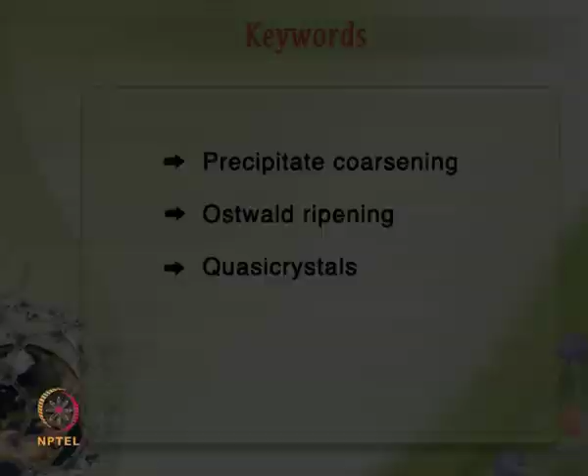Last class we were talking about precipitation. There is one concept in precipitation which we have not yet covered. I thought today we will talk about it, that is coarsening.

Particle coarsening. People also call it by another name. Anybody heard of it? Any precipitates, when you heat them to higher temperature, take the alloy to higher temperature, the precipitates coarsen. This phenomena has a name generally used in age hardening. It is called Ostwald ripening.

Ripening, yes. Both basically refer to the same concept. So why should particles coarsen? All of you know, whenever the temperature is high, diffusion is there, so there is growth.

But at the same time, if all the particles are of the same size, if you assume there are a number of particles inside the material, all precipitates, and all of them are of the same size, then you would never see any particle coarsening. Particle coarsening happens only when there are particles of different sizes, and in fact some particles dissolve and decrease in size, while some particles increase in size.

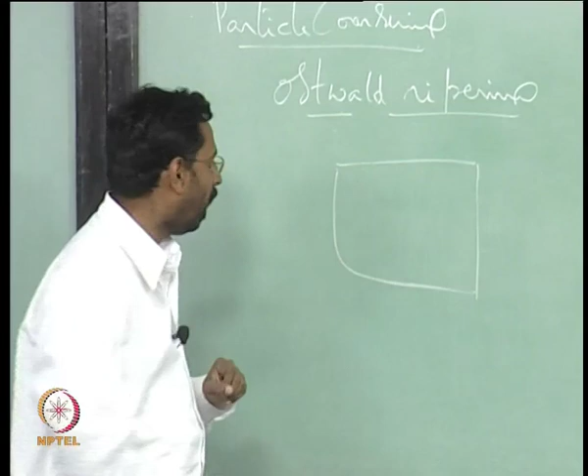This is the basic phenomena of coarsening, and we will understand it again through the same free energy concepts. If you look at a material, let us say this is one grain and you have particles of different sizes, something like this.

You may ask me, sir, how do you get particles of different sizes? When do you get particles all of the same size? Can you tell me? If there is homogeneous nucleation at some time t equal to 0 and there is no further nucleation after that.

Nucleation is a transient phenomenon, and I told you that there is a hierarchy of sites where nucleation can happen. For example, nucleation can happen on the surface first, then at grain boundaries, then at stacking faults, dislocations, and vacancies. So there are a variety of places where nucleation can take place, and once certain nucleation sites are occupied, the other nucleation sites start becoming active.

The nucleation sites with the highest energy, once they are all occupied, then the nucleation sites with lower energy, lower with respect to the highest energy, will start working. For example, if for some reason it is not possible to nucleate on the surface, or if the surface is fully covered with nuclei...

then as a function of time the nuclei which have formed on the surface will start growing, and at the same time you will start seeing further new nuclei, either at the triple junctions or at the grain boundaries. And once they are covered, as they start growing you may see further nucleation taking place, maybe at the stacking faults or at the dislocations.

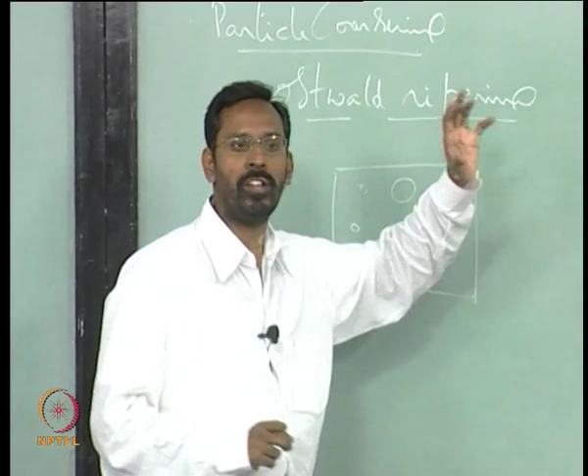We know pretty well that at high temperature you are providing sufficient thermal energy and thermal activation for diffusion to occur. So there is a possibility that all particles can grow, but do you see all the particles grow or not? If we try to understand this precipitate which is in equilibrium with the matrix, and this other precipitate which is also in equilibrium with the matrix, the matrix composition in equilibrium with each is never the same.

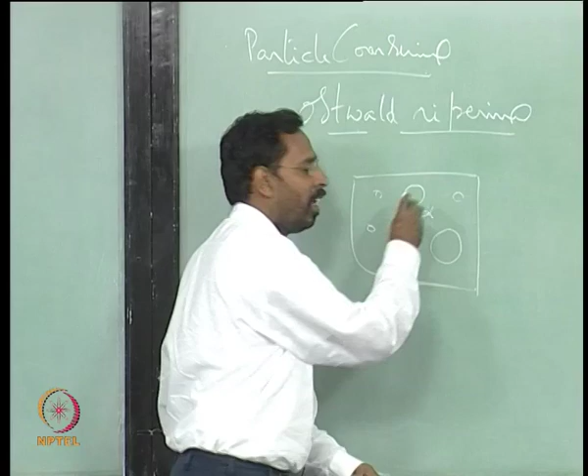How does this come about? The matrix composition, which is alpha in our case, let us say this precipitate is theta. The composition of alpha in equilibrium with this theta is the same, and this is also the same theta. But the composition of alpha in equilibrium with this theta is different from the composition of alpha in equilibrium with that theta. Why does this happen?

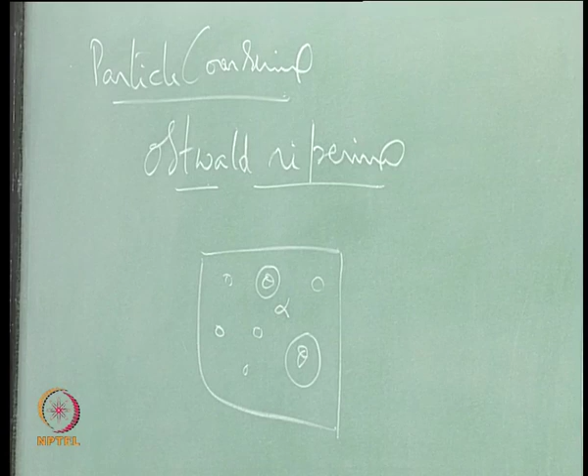The composition around that theta, copper will be less. Why? Because the diffusion has occurred for a longer time? No, it has nothing to do with diffusion. It is the curvature effect.

Because of the curvature effect, you would see the free energy of those two particles is different. Whenever we talk of a free energy diagram, we always talk about volume free energy only, we do not bring in the surface free energy term. That is why in all the free energy-composition diagrams you draw, you assume that the precipitate size is infinite.

Actually the precipitate size is not infinite, and different precipitates will have different free energies, though they all have the same structure and same composition, because the surface energy has to be added to the volume free energy to get the actual free energy.

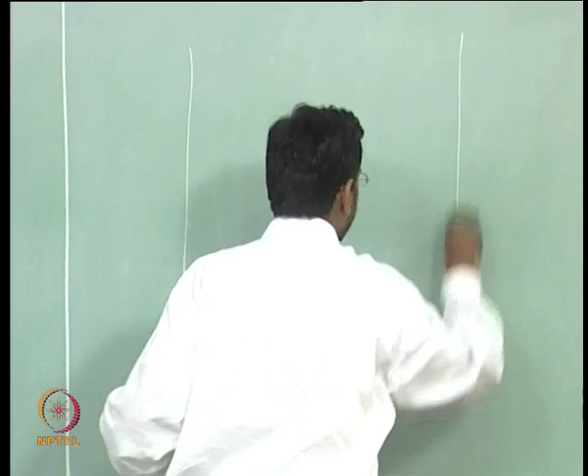So a smaller particle will always have a higher free energy compared to a larger particle. If we draw this Gx diagram, this free energy-composition diagram, this is alpha, and this is theta phase with a larger particle and theta phase with a smaller particle.

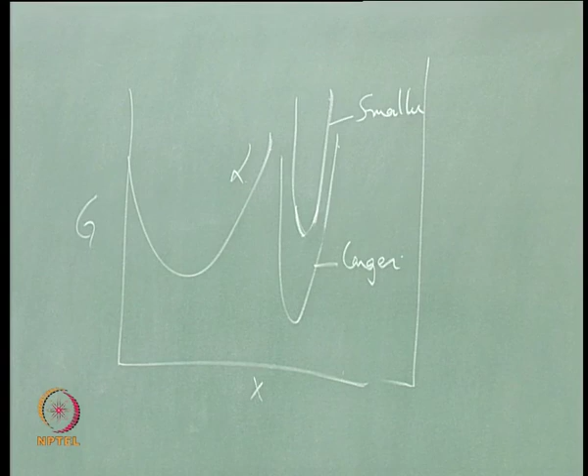So a smaller particle will always have a higher free energy compared to the larger particle. If I now draw a common tangent, you would see this concept I just mentioned: the composition of alpha in equilibrium with a larger particle is different from the composition of alpha in equilibrium with a smaller particle.

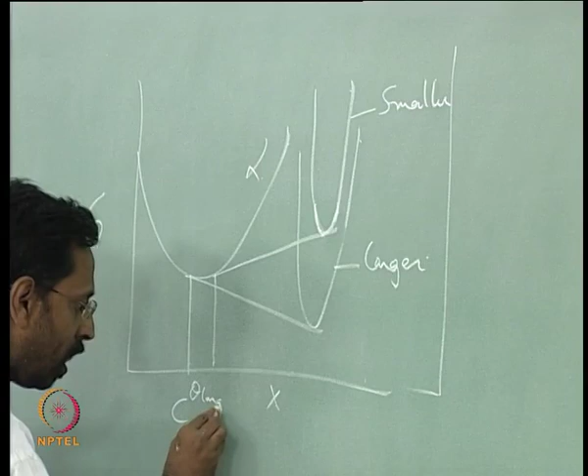So this is the composition of alpha in equilibrium with theta, which is let us say larger, and similarly this is the composition of alpha in equilibrium with theta, which is smaller.

The moment that is the case, if I now look at a smaller segment where you have one small particle, one large particle, and alpha in the middle, the composition of alpha just in front of this particle is different from the composition just in front of that particle. Which is higher? The smaller particle has the higher composition.

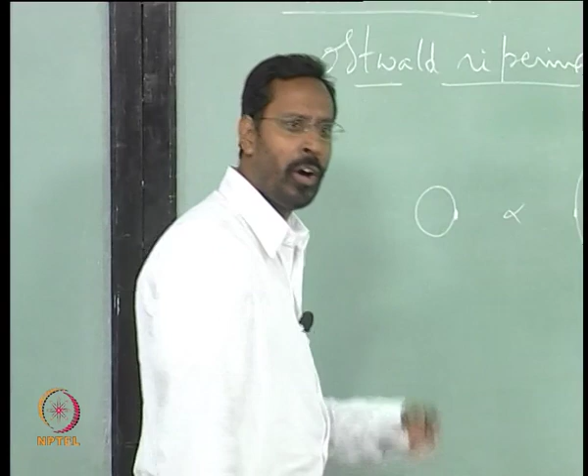So if I now draw what is called the compositional profile, how would it look? What is the composition of the theta phase in aluminum copper? Al2Cu or CuAl2, am I right? And what is the composition of alpha?

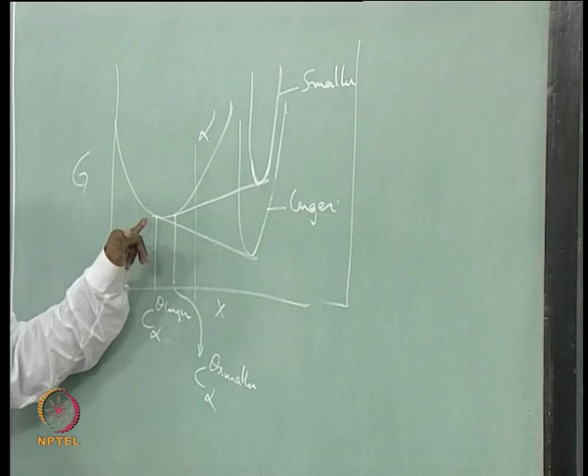That is the composition with which you have started, the alloy composition, somewhere here, which will be a two-phase mixture. What we are talking about is the equilibrium composition of alpha. If you look at the phase diagram, this is let us say alpha plus theta here, and this is alpha. So we are talking, at any given temperature, about this composition.

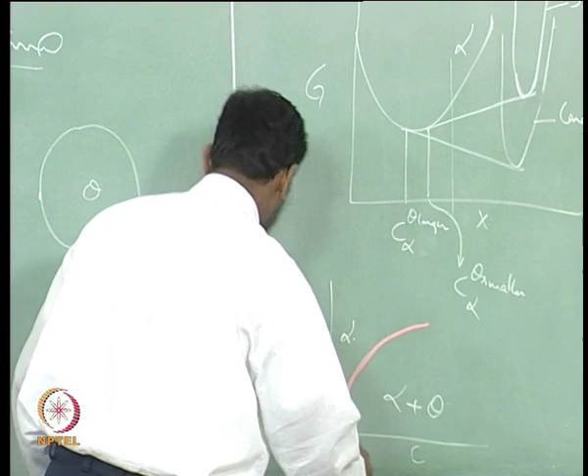This composition you are looking at is, of course, a temperature versus composition diagram, or Tx diagram, since we called the other one a Gx diagram. This line, what is it called? The solvus line. This solvus line always assumes that theta has an infinite size.

Any phase diagram, any solvus line that you see, the assumption is that the second phase and the parent phase, both are... the parent phase is anyway a matrix. So you can't talk about a size of it. And there, in principle, if the parent phase is also a nano grained alpha, let us say, it would definitely have a different free energy. So there also we always assume that the grain size of alpha is infinite, and also that the precipitate is also almost an infinite size.

The moment you bring in size effects, then you will start seeing that the free energies start shifting. The alpha also, instead of an alpha of a very large grain size, if I now start looking at nano grained alpha trying to precipitate out of the theta, then the alpha free energy curve also will shift. So nano grained alpha will have a definitely higher free energy with respect to an alpha of a much larger grain size. So all those things are what we call size effects.

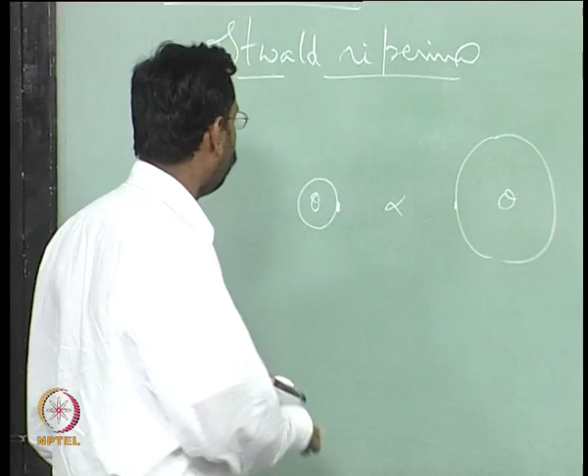So this solvus is in principle for an infinite size, and the moment I assume that the theta has a smaller particle size, you would see that the composition will be different. And if I try to draw, you would see that if I draw composition...

Let us imagine that this precipitate has a certain composition. This is the composition in terms of percentage copper. If I plot, this is some value, let us call it whatever the Al2Cu composition is. In terms of weight percent, it is approximately, let us say, 55%.

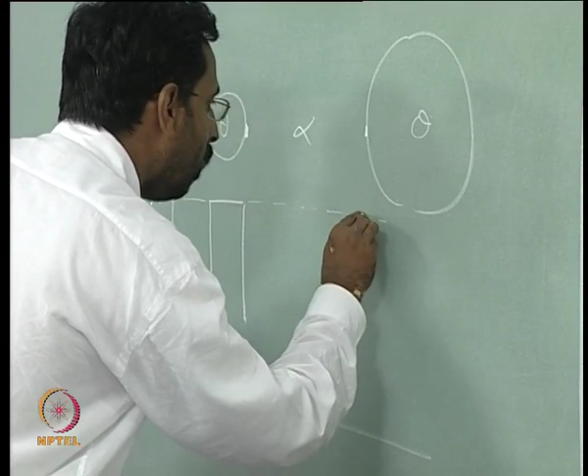Now this is the composition of alpha somewhere here, which is, just for the sake of understanding, let us again take this. The composition here also, inside the precipitate it is the same composition, it is the same theta, this whole thing is theta. So the composition of the theta is this value. So inside the theta the composition is this, and then if you look at this is the alpha composition here, and the alpha composition here will be different. So there is a gradient here inside this.

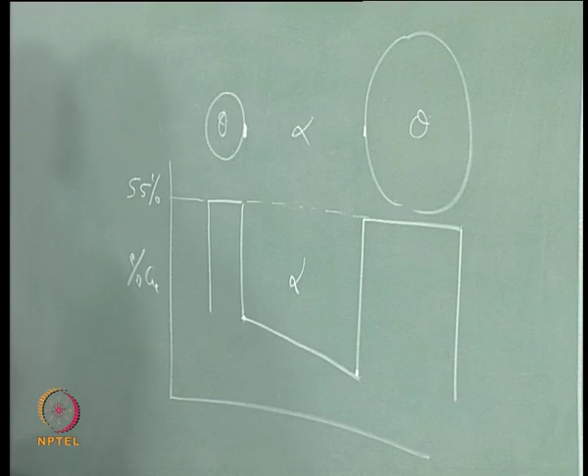So if I look at the concentration profile, it looks like this. If I start from the center of the particle to the center of the next particle, let us not bother about the other sides, because on this side there may be another particle, on this side there may be another particle — we will not bother. So we simply look from the center of this particle to the center of this particle. If you simply look at the composition profile, this is how you will see it.

Inside the alpha there is a gradient here. The smaller particle — the alpha which is in equilibrium with the smaller particle will have a higher composition, the alpha in equilibrium with a larger particle will have a smaller composition. And once you have a gradient, you always have diffusion, you will always have a flux at any given temperature.

Because flux J equals minus D into dC by dx, and that dC by dx you can see here — the x is nothing but the interparticle distance. Once you know the interparticle distance, you can talk about what is dC by dx, and at any given temperature D can be known. So you can actually see, and how — what is the result of this diffusion?

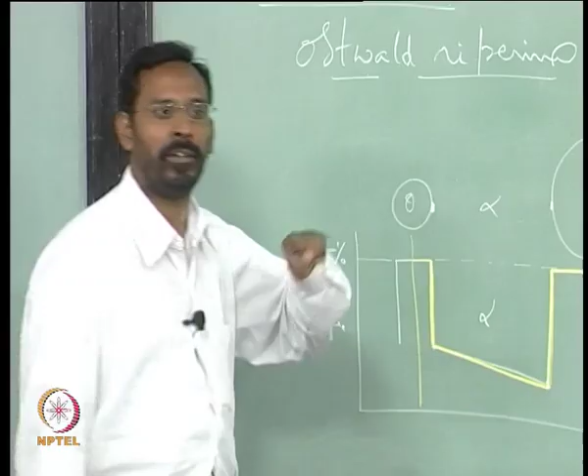You see that copper atoms which are here want to diffuse towards this, but you need a constant supply of copper atoms for the copper atoms to go down the drain, down this particular decreasing concentration gradient. Where are the copper atoms coming from? The copper atoms come from this particular particle. The smaller particle provides the reservoir of copper atoms, so that the copper atoms start moving in this direction, because the theta has a higher copper content.

So this theta rejects some copper atoms by dissolving by a small amount, small delta x of this theta. If it dissolves, let us say, what happens? Some copper atoms are released, and those copper atoms will move down this concentration gradient and come to this region, and once they reach that region, this particular theta needs copper atoms for it to grow. So it provides copper atoms.

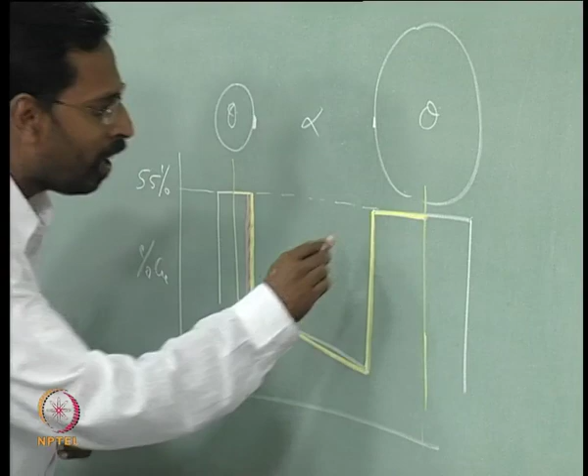Once the copper atoms come towards this, they join this particular theta, and the theta grows by a small delta x, depending on how many copper atoms have come and joined. So this gradient will more or less remain the same, except that the concentration values — this value and this value — what do these two values depend on?

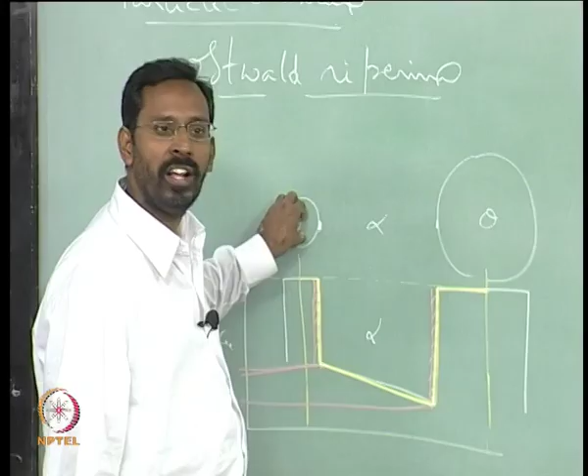As the radius of these two particles change, in principle these values also change. As a particle becomes smaller and smaller, as it shrinks, what happens? You can see as this particle shrinks, this free energy goes up. If this free energy goes up, the common tangent starts touching it at a composition which is farther, which is higher in copper content.

So that means you would see that this value keeps going up. And what happens to this? As this starts becoming larger and larger, this free energy comes down, and the common tangent again means the copper content of alpha comes down. That means you actually see that the gradient is increasing.

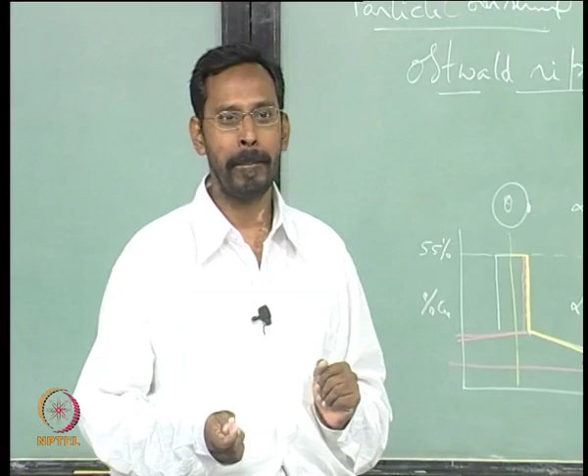Because the dc, delta c, which is nothing but the composition of alpha in equilibrium with the smaller particle, theta smaller, minus composition of alpha in equilibrium with theta that is larger, this delta starts increasing as the smaller particles start becoming smaller, the larger particles start becoming larger.

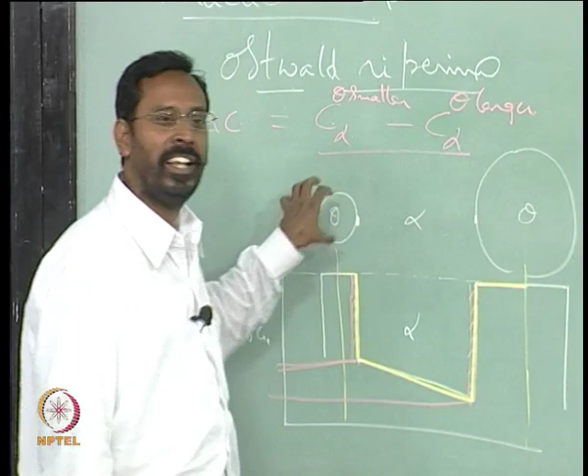So in the process what happens is, slowly smaller particles will dissolve. At the expense of these smaller particles, the larger particles start growing. It is like we see that in typical life, the bigger ones try to grab the smaller ones. Exactly the same thing is happening here. The bigger particle is just growing at the expense of the smaller particle, and the whole driving force for such a thing is coming because of this free energy.

So once you understand this free energy, that the free energy of different particle sizes will be different, you can easily understand why this is happening, and this gradient starts increasing.

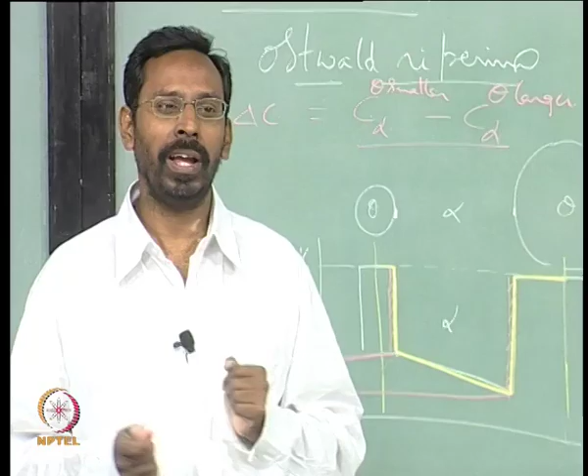And of course, the distance, you may ask what is going to happen to dc by dx, when this theta is growing and this is decreasing. In principle they may remain the same or can change to some extent, but we do not know what is the rate at which this decreases, what is the rate at which this increases. So there may be a small change in dx also, but dc you can see is significantly large, and because of which more and more.

So as the time proceeds at that temperature, you will see the flux, the rate at which the atoms move, is going to be higher and higher. This is usually against the normal case of precipitation.

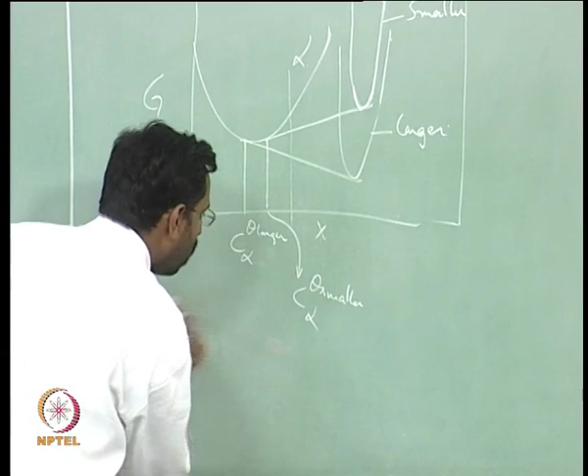In a normal precipitation, how does the precipitation happen? If you look at the precipitation concentration gradient in precipitation, so the moment the alpha, if you take alpha, inside alpha, the moment a small nucleus precipitates, a small theta precipitates, how does the further growth happen there?

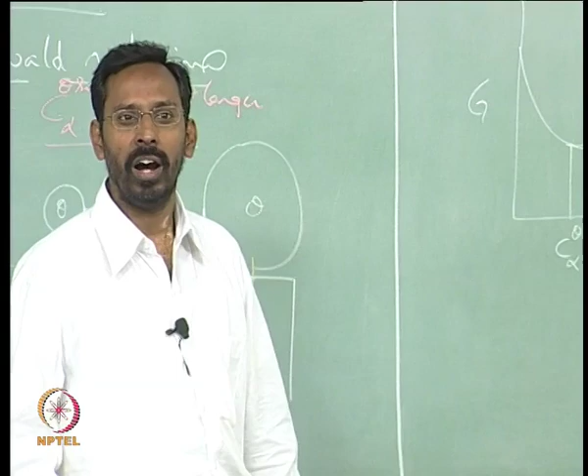The further growth happens again because of the gradient. Where is this gradient coming from? So the alpha that you have, the starting alpha, is this alpha, am I right? That is 4% copper.

The moment a theta is precipitated inside the alpha, the alpha which can be in equilibrium with the theta is not this alpha. This 4% alpha cannot be in equilibrium with theta. Why? Because if I take, forget about the smaller particle, let us look at the larger particle as the equilibrium particle, or you can choose any of them. In principle, if you look at this particle it cannot be in equilibrium with this, because you cannot draw a common tangent between this point alpha of that composition with the theta.

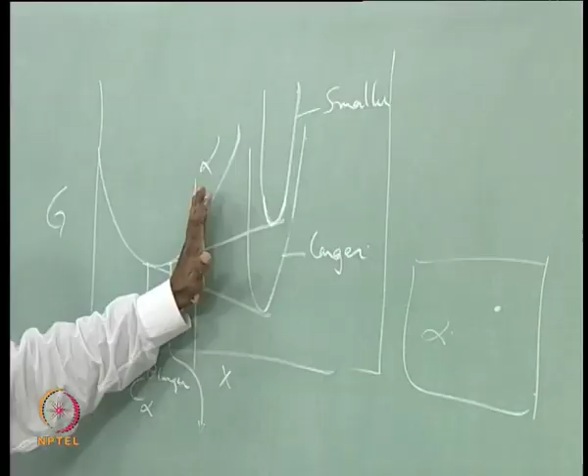The only equilibrium that you can have is with the theta with some other alpha, and that is what we call the composition of alpha in equilibrium with theta, and that composition is different from this theta with this starting alpha. And as a result, if I now draw again a concentration profile...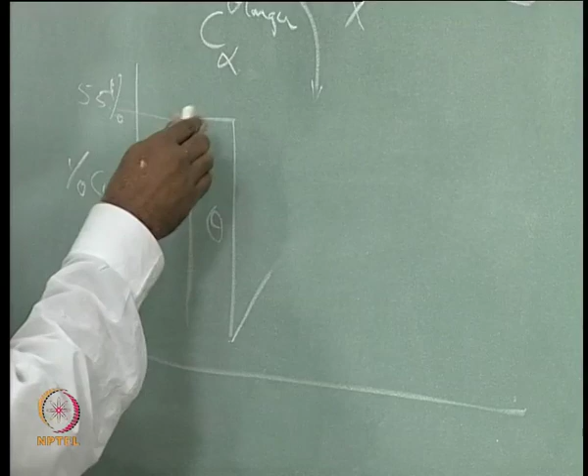Yes, adjacent to theta is a lower copper content, because of which you will see - I have really exaggerated it, it will not be like that, because this is 55 and this is actually 4%, something like this.

This is the percentage of copper, this is the alpha of the initial alpha, the alpha with which you have started. You have taken an alloy of 4% copper, made it into a solutionized condition and then quenched it, and from there the actual precipitation has started. That particular alpha is 4%, but the alpha which is in touch with the theta is actually smaller, and because it is smaller, now you see there is a gradient here.

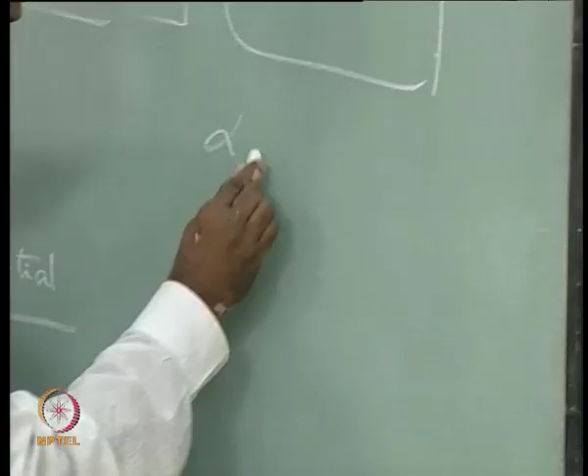Because of the gradient, the copper which is in alpha starts moving towards the interface, and once it starts moving, some copper atoms get accumulated there. Once the amount of copper atoms is sufficient for the theta, because theta is 55%, as copper atoms keep coming towards theta, once in a small region the copper atoms reach 55%, that small region gets converted. It's almost like alpha of 55% copper gets converted to theta of 55% copper.

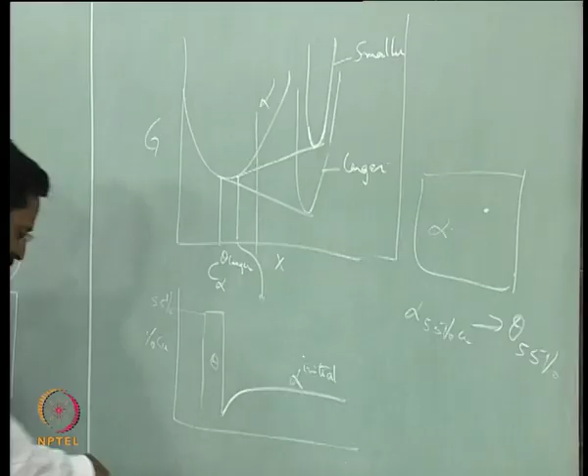It is almost like a polymorphous transformation, allotropic transformation kind of. Once the copper atoms reach that concentration level, it is only a structural transformation now, an FCC structure changes to a theta structure. So as the copper atoms get accumulated in that small region, that region gets changed to theta, and as a result the theta grows by a small distance.

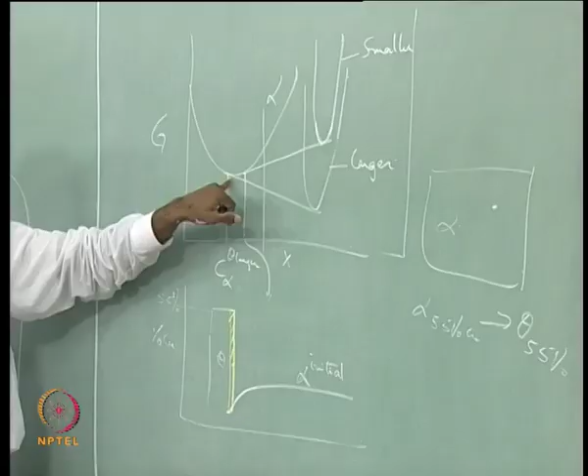But in the whole process, because the whole precipitation is happening at a fixed temperature, this value will never change, because it comes from the free energy diagram, and free energy diagrams are always drawn at a fixed temperature. At a fixed temperature the composition of alpha in equilibrium with theta is fixed, provided the theta size has not changed to such a significant extent that its value can change. If the theta size changes, this value can also change, otherwise you can say this value is fixed. Once this value is fixed, what is changing as a function of time in this whole process?

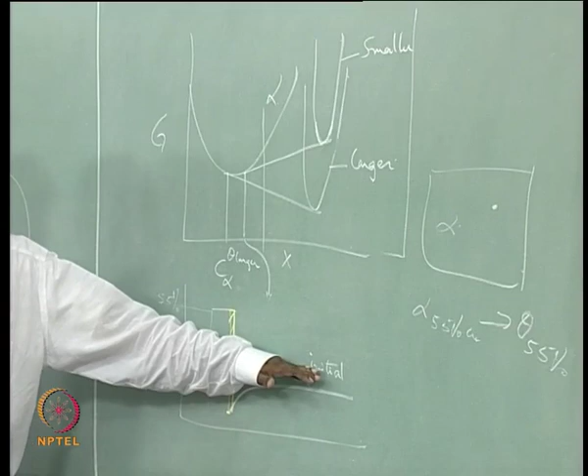You have atoms of copper coming from this region towards this, and theta is growing, and this is fixed. So what changes? The composition of alpha in the matrix, what happens to it? It decreases, because the copper atoms are being released from here and coming here. So the alpha concentration decreases, and once it decreases, what happens to the gradient? The gradient decreases, and as a result the process becomes slower.

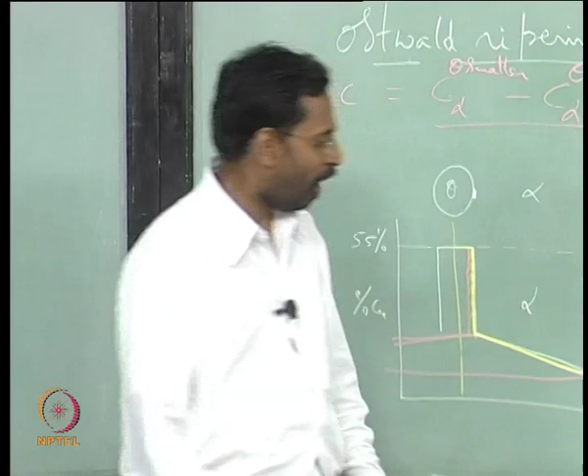The reason why I had to tell you is that it is the reverse of this. So as a result you can see, as a function of time you will see this behavior.

Sir, when theta starts growing, does further nucleation take place? Yeah, I am not talking about that situation. We are talking of one particular theta with respect to its alpha. How does this grow?

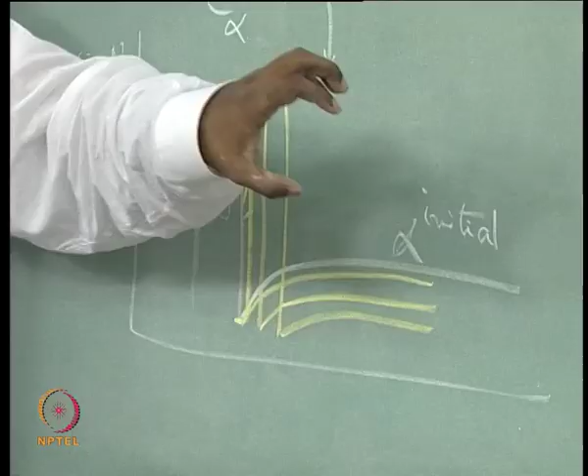There will be another nucleation somewhere else, at that region also similar thing will happen. As this theta wants to grow, it can grow only when copper atoms come and join it, otherwise theta cannot grow, because theta needs 55% of copper atoms. So unless they are supplied to that alpha-theta interface, theta cannot grow. And where do these copper atoms come from? They cannot come from thin air, they have to come from the alpha only. As the alpha supplies more and more copper atoms to theta, alpha gets depleted in copper.

How can it cause further nucleation when it starts growing? No, this is a small region, a very small region, and there can be some other region where, see, this whole thing is happening in a region of a few hundred nanometers, and in an alloy the grain size itself is very large, 100 microns or so. So in some other corner of the grain another nucleation event can happen. We are talking of that particular theta, which in the beginning is about 10-20 nanometers, and how that particular theta is growing, that is what we are looking at.

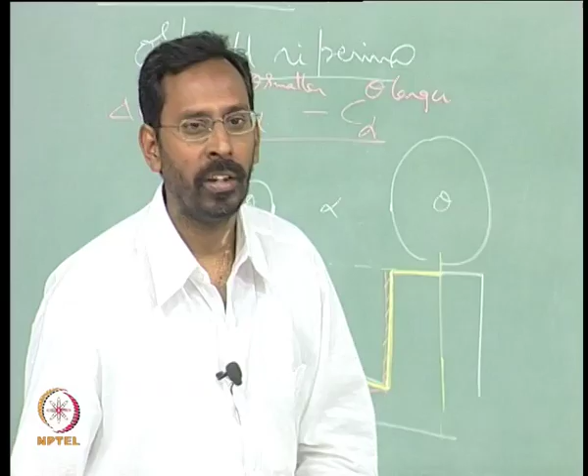So as a result, after some time the whole thing would become like this, the theta would have grown to a certain extent, and then the alpha composition comes to that of the equilibrium composition. That means there is no more excess copper left in the alpha to be supplied to the theta, so now the growth stops. Once this happens, the gradient is 0. Once the gradient is 0, there is no flux, and if there is no flux, there is no growth. So this is how the actual precipitation takes place.

This, vis-a-vis the next topic that we are going to cover, which is called spinodal, you will see there is a lot of difference between this and the spinodal. We will talk about it in a minute. So is this clear now? So, how do precipitates grow? Yes.

Why is this lower compared to this? Am I right? So, okay. So the point is, let us not talk about all this.

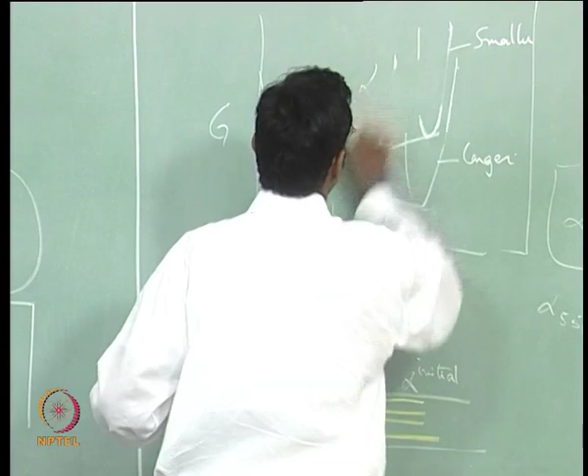Imagine I have started with an alpha of certain composition, this is a 4% copper alloy. I started with this alloy and I am holding it at some temperature. I am holding this alloy which is solutionized, brought to this temperature, quenched, and held at that temperature. At that temperature, is alpha stable? It is not stable. So alpha as a single phase is not stable.

Be very specific when you say alpha is not stable. You still have, in the equilibrium phase diagram, alpha plus theta. We cannot say alpha is not stable at all. Alpha as a single phase is not stable. Alpha can coexist with theta for that particular composition at that temperature.

And now, if it is not stable as a single phase, it wants to precipitate. How do you understand this precipitation? Simply draw a tangent. If I draw a tangent at that composition, then what are all the phases whose free energy is below the tangent? All those phases can in principle nucleate.

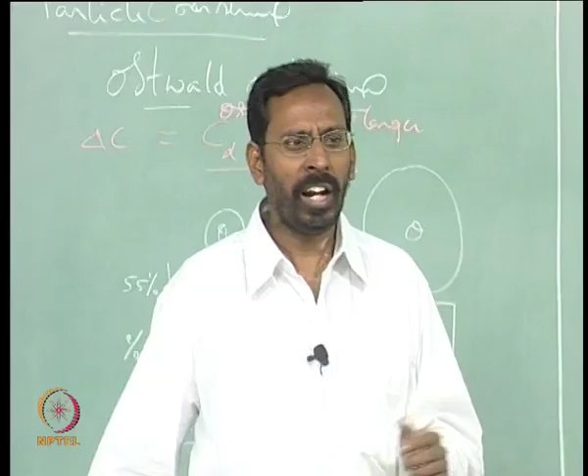Let us not consider all the various phases that are possible, just look at only one phase, call it theta phase. That theta phase, the moment I look at it at that temperature, has a certain free energy, and the moment there is a driving force, this theta will nucleate.

The moment the theta nucleates inside the alpha somewhere, either at a grain boundary or wherever, this theta cannot be in equilibrium with this alpha. It is impossible that you can have a common tangent between the two.

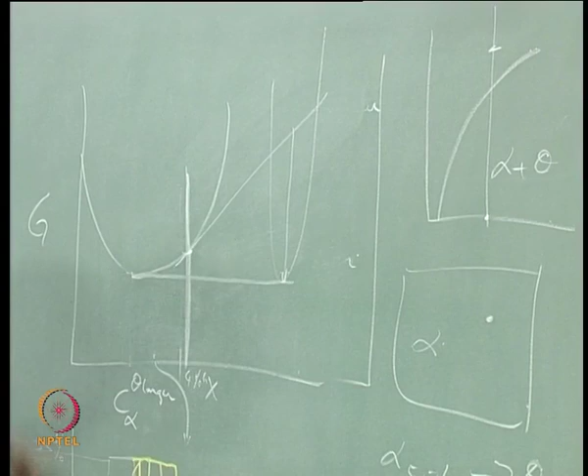So then what happens is, you will see that this theta will find out some composition of alpha with which it can be in equilibrium, and as a result the alpha which is adjacent to that theta will have a different composition.

In fact, this can even be physically understood. When you think of theta nucleating inside an alpha, theta having a higher copper content, what happens is copper atoms get accumulated in a small region, and that region gets converted to theta. If you want to call it a nucleation event, then they are getting accumulated from alpha.

So the region adjacent to that obviously gets depleted. This depleted region has a different composition. So the alpha which is in equilibrium with theta has a composition which is lower, and the alpha which is far away from this nucleation site actually has the starting composition.

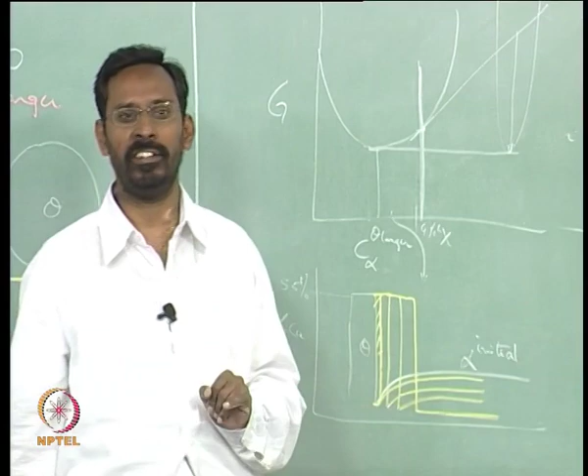The starting composition is this, and the composition in equilibrium is this. This is what we are talking about as the gradient. If this difference was not there, there would be no gradient. Clear? But the theta, immediately after it splits, the grain size is very small. Yes, and then the free energy should be higher.

In principle, you are right, very right. So, in principle, if I consider that the theta is very small, you can actually draw the free energy curve of theta which is much higher, and see that the common tangent with that particular theta can be almost like...

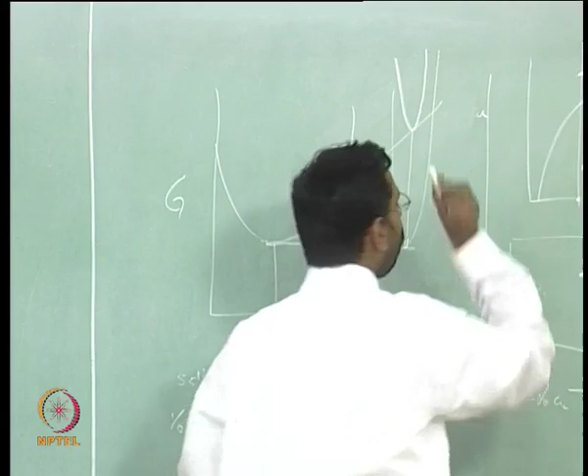If this is the theta at the nucleation site stage, you can actually draw a common tangent between that theta and the starting alpha itself. This is assuming that particular small amount, but this is only at the nucleation event.

But when you want to talk about the overall driving force for nucleation, you should always consider the theta after it has grown. After the whole precipitation process is over, when you look at the microstructure, compare that theta with what we calculate only from the bulk free energy point of view, where surface energy is not considered—that turns out to be this.

This is only the volume free energy; this plus the surface energy—this whole thing you can call delta G surface, or gamma if you want—corresponding to that particle size, whatever the initial particle size is. So the free energy gets lifted because of the surface energy, and at that particular moment you can say yes, it is in equilibrium.

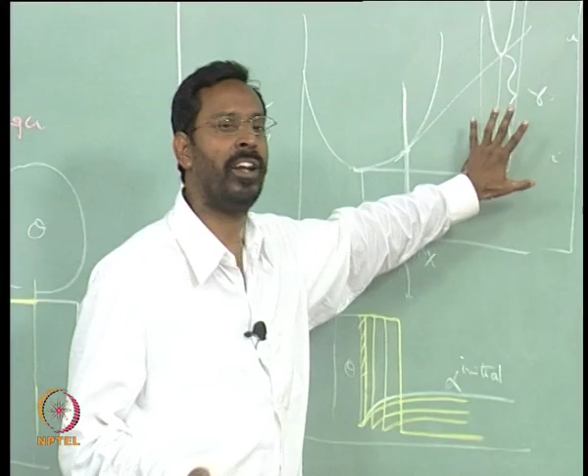But the moment it grows even to a smaller extent, it cannot be in equilibrium with that. So that is the reason why most free energy-composition diagrams are always drawn considering only the volume free energy. Capillarity effects or surface effects are not considered, and once you start considering them, this kind of concept comes into picture.

In principle, in this case we have considered the size factor, correct, because there is a size distribution. If there was no size distribution, we would not have considered the size effect.

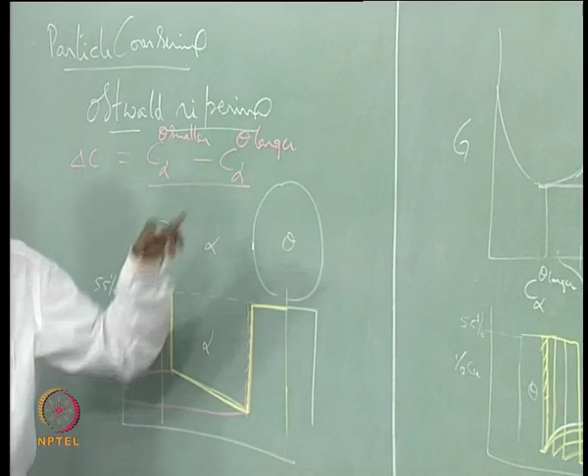Because there is a size distribution, you wanted to know which particle will grow. Only if you understand that, will you understand this. Otherwise, when you are looking at one individual particle, you need not consider its size effect.

Now let us come to the next concept, which is similar to precipitation, which is what we call spinodal decomposition.

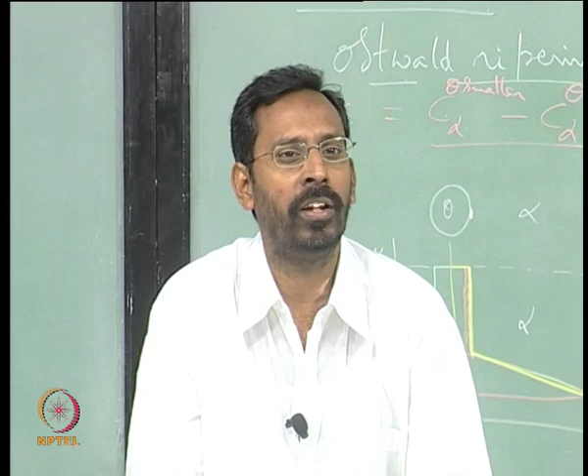Let us try to understand the free energy concepts involved in this. As you can see, we call this decomposition, not precipitation. There is a difference between a precipitation and a decomposition. What is the difference? When you say decompose, in English it means something is splitting into two, that is what we call decomposition. When you say precipitation, basically something is precipitating out of something else.

So there is a matrix from which some precipitate is coming out. Here, when I say decomposition, a matrix is splitting into two, that is the meaning of decomposition.

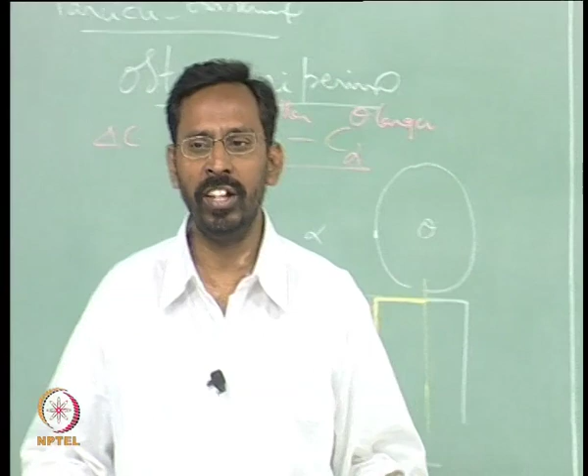Let us try to understand that. You will see that spinodal decomposition always occurs when the phase diagram shows a miscibility gap. When there is no miscibility gap in the phase diagram, you will never see a spinodal decomposition. So let us consider a phase diagram with a miscibility gap, something like this, alpha splitting into alpha 1 plus alpha 2.

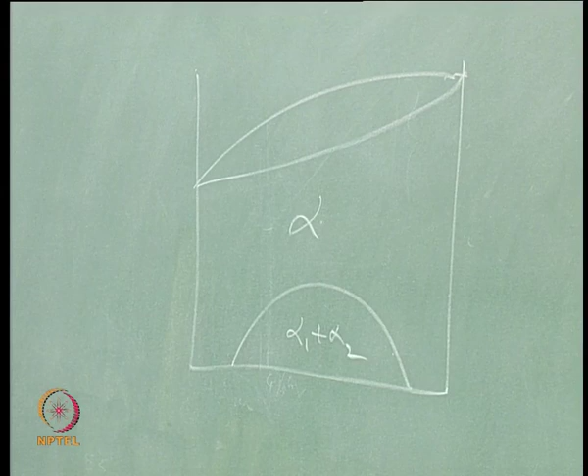Whenever you talk about spinodal decomposition, you need to consider one aspect of stability. What is the stability? Whenever a free energy curve looks like this, this phase is called a stable phase.

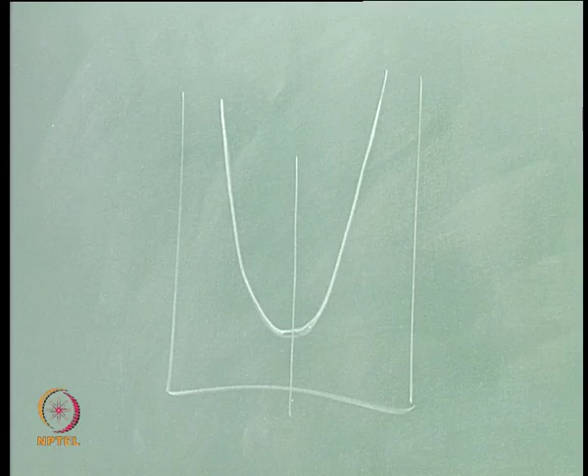Why? Because if I take an alloy of this composition, if this alloy wants to decompose into two different compositions of the same structure, that is what decomposition means. That means alpha giving you alpha 1 plus alpha 2. If we call this free energy of alpha, g versus x, if it splits into two, one with a lower composition, another with a higher composition, so that the overall composition remains the same.

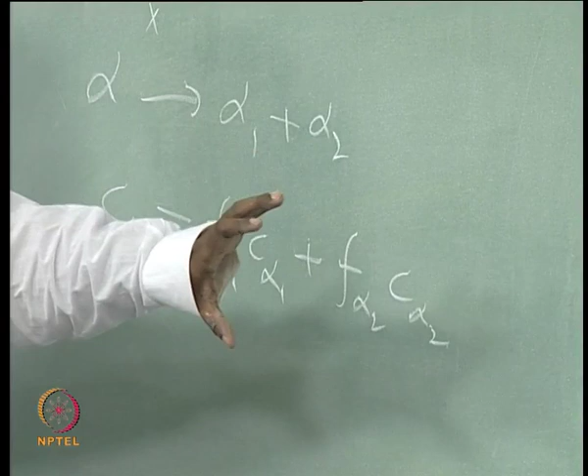That means, if I do the volume fraction of alpha 1 multiplied by the composition of alpha 1, plus volume fraction of alpha 2 multiplied by the composition of alpha 2, it should be equivalent to what? The composition of alpha with which I have started. This is what is the mass balance. As long as the mass balance is maintained, the alpha splits into some part of alpha 1, some part of alpha 2.

For such a process to happen, what is the overall free energy of such a mixture? If this is the free energy of alpha 1, this is the free energy of alpha 2, then the mixture will always have a free energy decided by the line joining those two. Any two phases having two different free energies, if you want to know the free energy of the mixture, you simply draw a line joining the two, and for the composition of interest, if I choose this alloy composition having these two phases, the free energy of such a mixture is this. This is the two phase free energy.

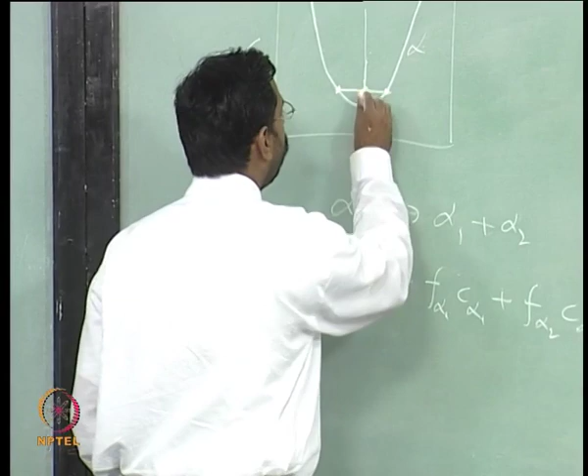That is what we have been showing in all the phases, even earlier, in precipitation also, whenever an alpha phase splits into alpha plus theta, the alpha-theta common tangent that we consider, that particular point on the common tangent gives you the two phase free energy. The single phase free energy, if it is higher than the two phase free energy, then only precipitation will take place. So this is the free energy of this mixture, and this is higher than the free energy of a single phase.

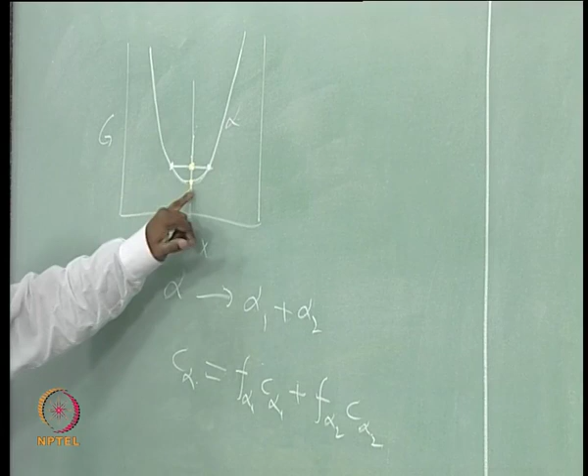As a result, such a decomposition is not usually observed, because there is no driving force for such a thing to happen. So for a single phase alpha to split into two phases in this kind of situation does not happen, because there is no driving force. Because of such a decomposition, the free energy is actually increasing rather than decreasing. We know that every process where there is a decrease in free energy is favorable, and an increase in free energy is not favorable, is it not?

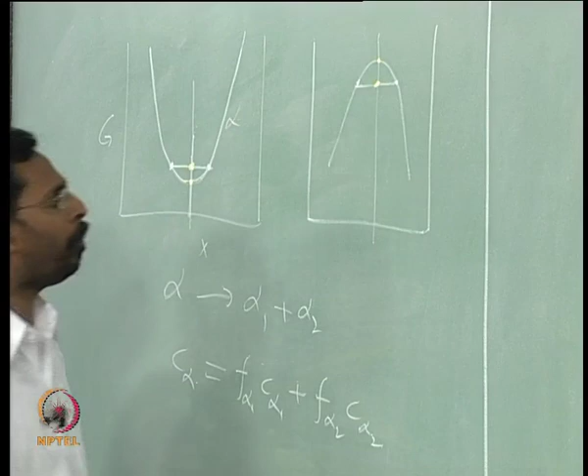But if your free energy curve is like this, then this alpha can split into two phases, alpha 1 plus alpha 2, which have a free energy of this. So from here to here it can split, and it cannot only split like that, it can keep on splitting more and more.

That means the alpha 1 and alpha 2 composition will keep on deviating more and more from the alpha, and this causes further decrease in the free energy.

That means if I start with an alpha having a uniform composition, and if this alpha is having a free energy curve something like this at a certain temperature, then what happens is suddenly this alpha is not stable, because its free energy curve is like that.

So what happens is there will be a small fluctuation, even a small thermal fluctuation. Temperature, whenever you say this particular alloy is at 500 degrees centigrade, this 500 degrees centigrade is a bulk temperature that you are talking about.

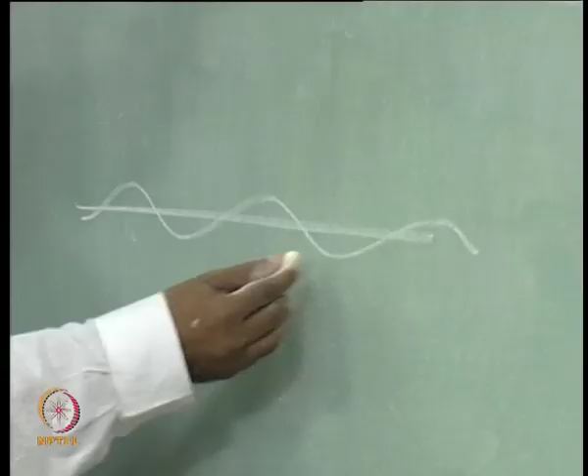In a small region of a nano scale, you can always have small changes, and this can cause compositional fluctuations in such a way that there can be a small region where the composition can decrease and another region where the composition can increase.

Though I have drawn it with such a scale, this can happen in less than a nanometer scale. So in less than a nanometer scale, you can see a small region where the atoms move, because there are always atoms moving at any given temperature unless you are at absolute zero.

Because of these atomic fluctuations, you can see a region where the composition goes slightly below the nominal composition in some region, and obviously those atoms have to move somewhere else. So they go to some other region where the atoms are more than the nominal composition.

Once this happens, this kind of fluctuation is a stable fluctuation, because the moment such a change happens, this region with lower copper content and this region with higher copper content, let us say, will be a stable couple, because that has resulted in a decrease in the free energy.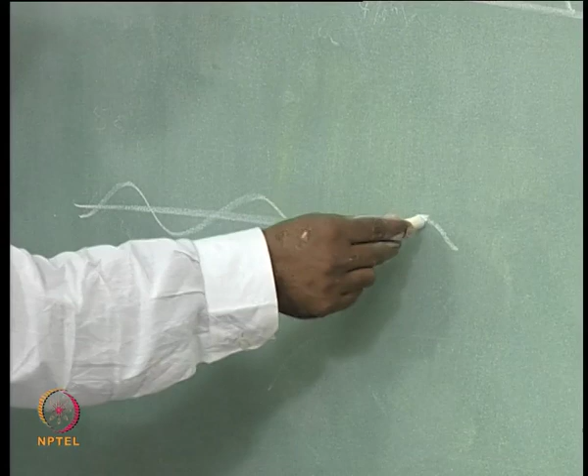But if that happens in this alloy, it will not be stable. What happens is the atoms will come back, the excess atoms here will come back and join the alpha, so that again the alpha will have the same composition.

Whereas in this kind of situation, once the atoms come to this situation, they will not go back, because that is a stable situation. And now what happens is this particular thing starts growing. Why does it grow? Because by further growing you will have a further decrease in free energy.

So this fluctuation starts with the same wavelength. The wavelength gets fixed, which may be of the order of a few nanometers, and within that wavelength the amplitude starts changing. So this region becomes more rich in copper, this region becomes less rich in copper, but the overall composition satisfies the nominal value.

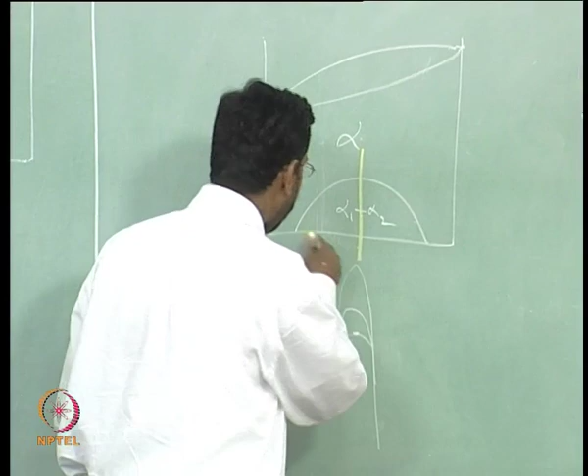The overall composition of the alloy is the same, but you will see these compositions start increasing and decreasing, to an extent that finally, if I take that alloy and hold it at room temperature, it will keep on growing until alpha 1 achieves this composition and alpha 2 achieves this composition. The lower one is alpha 1, let us say, and the higher one is alpha 2.

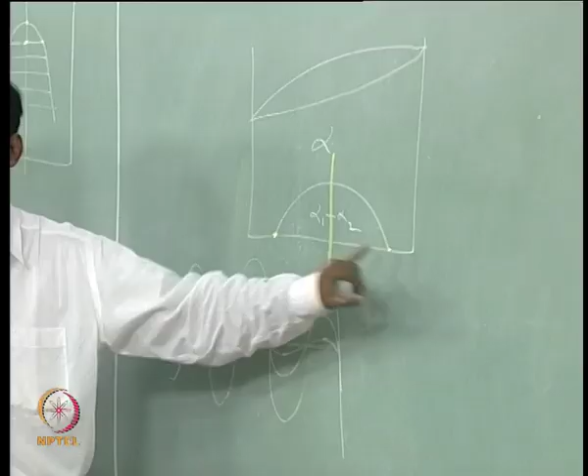So this wave, or this compositional wave, will keep on changing its amplitude to such an extent that finally you reach this value, and this is what happens whenever you have this. I have directly correlated this to this phase diagram, and we will see in a minute why I should correlate that to this. At the moment, this and this are not really correlated.

So you will see that whenever I take a phase with this kind of free energy diagram, you will actually see this kind of free energy diagram in this miscibility gap, we will see it within a minute. So if that happens, you can see this will keep on increasing.

This is in comparison to precipitation, where the composition of the precipitate is always fixed. You start with a certain fixed composition, and during the whole precipitation process, as a function of time, that precipitate composition is not changing, only the alpha composition keeps on changing. Whereas here, if you want to call these precipitates, they are actually not precipitates, but these are compositional waves.

Only when the whole growth has completed, then you will see this would be a different composition here and a different composition there. This happens homogeneously throughout the sample, whereas precipitation does not happen homogeneously—it happens heterogeneously at some nucleating sites, whereas here this happens throughout, because wherever it can happen, it is stable.

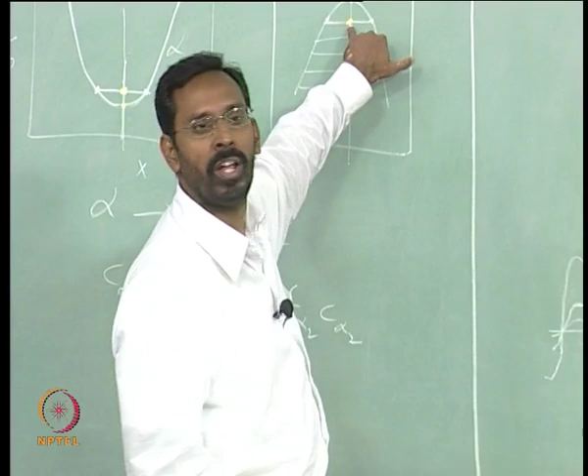So homogeneous nucleation can happen in this kind of situation, and it keeps on growing. This is in contrast to what I showed you in precipitation, where the gradient keeps on decreasing as a function of time. Here the gradient is actually increasing as a function of time.

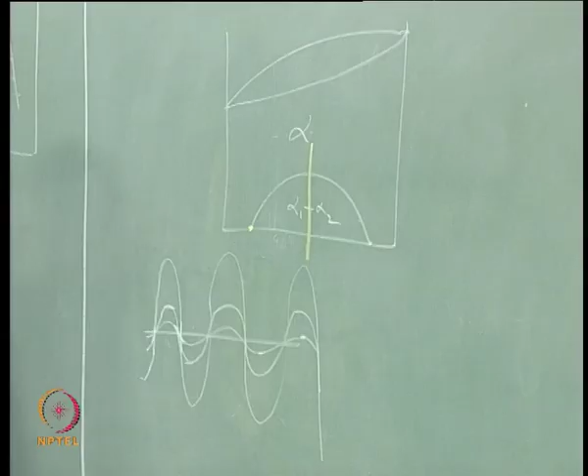If you look at the interface—call this one phase and this another phase—at the interface the gradient actually keeps on increasing, whereas in normal precipitation, at the interface between the theta phase and the alpha phase, if you draw a gradient, it will slowly decrease, because it slowly becomes like this, finally like this. So this gradient keeps on decreasing.

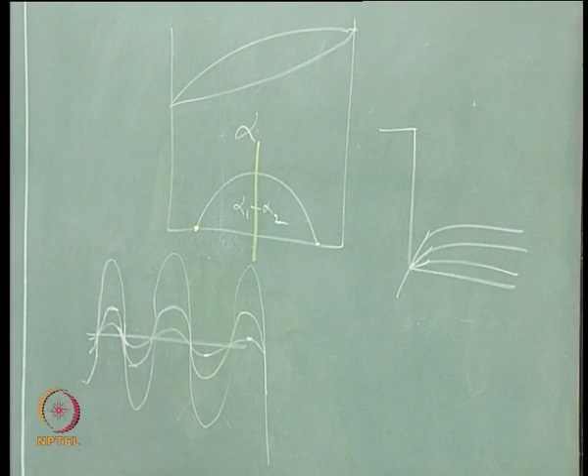Whereas here the gradient is initially zero—there is no compositional difference—and slowly the gradient starts building. That is why some people want to call this uphill diffusion, because the gradient is actually increasing.

How do I understand this from the free energy point of view? Let us now try to draw the free energy curve at this temperature. If I draw the free energy curve, it actually looks like this.

Am I right? Because when do you get a miscibility gap? When the delta H is positive. Whenever delta H is positive and higher than the T delta S mixing term, the free energy curve will have this kind of shape.

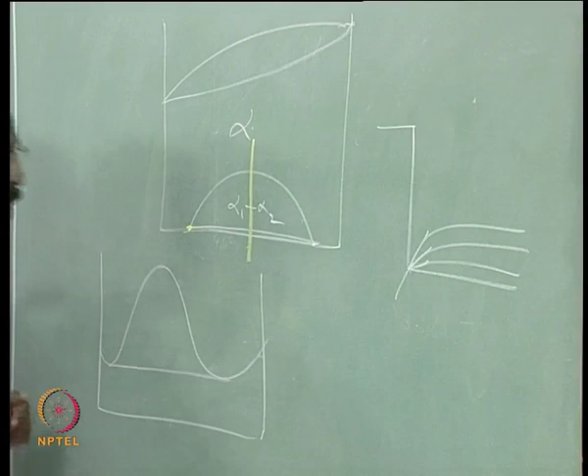If that is the case, and I draw a common tangent, you get these two points. What are these two points? We call them the binodal points. They are nothing but the equilibrium compositions of alpha 1 and alpha 2 at that temperature.

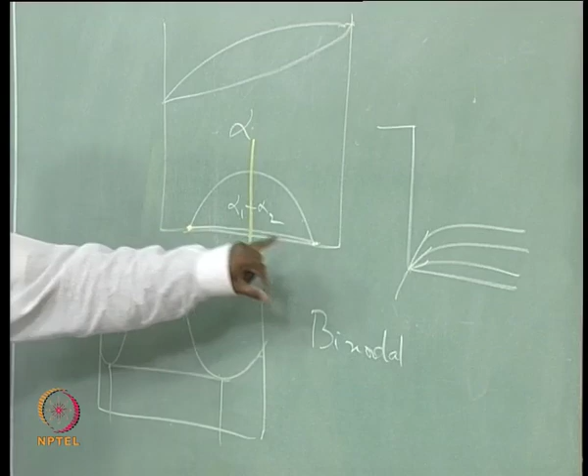Now, if you look at this, this particular free energy curve appears to be a mixture of two types of free energy curves—one like this, and another curve like this. If you look at these two curves, one is concave upwards and the other concave downwards.

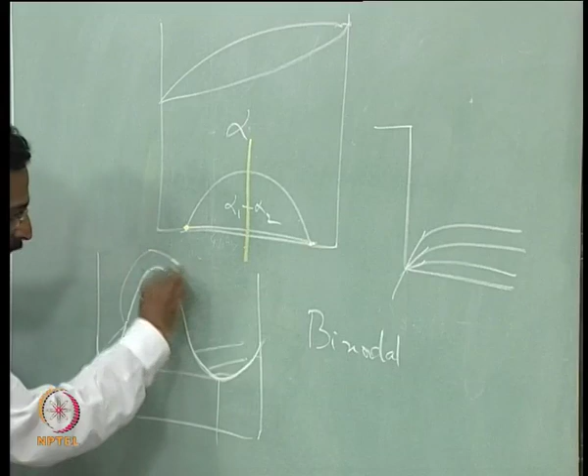So you have two parts here which are similar in nature, related to stable phase conditions, and there is one region in the middle where a change of slope takes place. If you look at the slope of this free energy curve as a function of composition...

What is the slope at the pure metal end? It is minus infinity. So this minus infinity slowly starts increasing, and when you reach this value—it's not zero, it need not be, it will be zero only when the tangent is horizontal, and the tangent need not be horizontal—so it reaches a higher value.

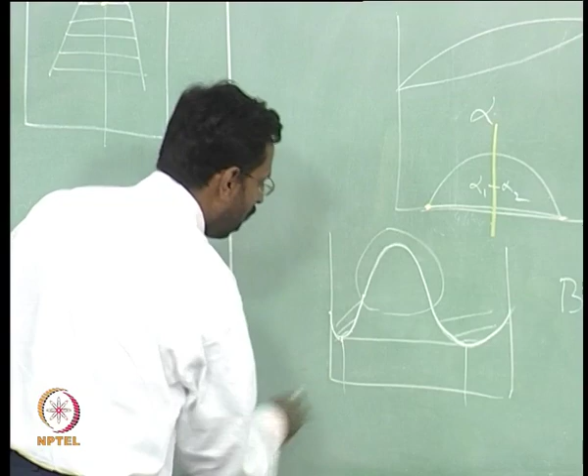So from minus infinity, if I now plot—in fact it would be nice if I plot it on this itself—from the minus infinity it keeps on increasing, and then the free energy curve, what is here, is positive, and it keeps on increasing, and at some point of time this slope is changing, right.

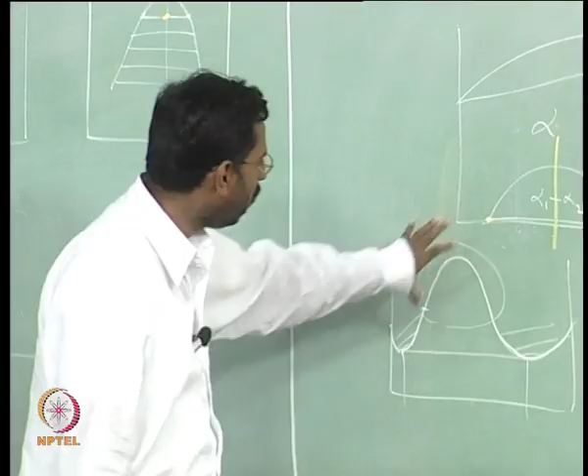So, can you draw these slopes? Next class when we come, I want you to see how this free energy curve, take any such curve which has an inflection inside, draw d g by d x, and then also draw d square g by d x square. Then you will see something interesting happening.

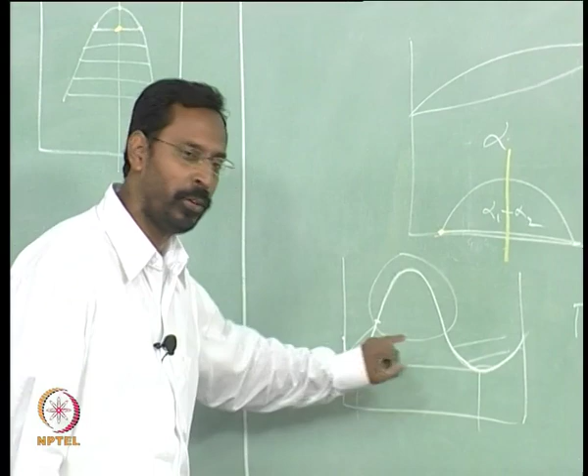Next class we will start with that, and by the time I want you to draw and see what happens. You will see something happens when you look at this part, and that is actually zero at these two positions. We will try to see that. So please draw a free energy curve, and just below it at the same scale draw this, and below that draw this at the same scale, and see how it changes. We will stop with that.